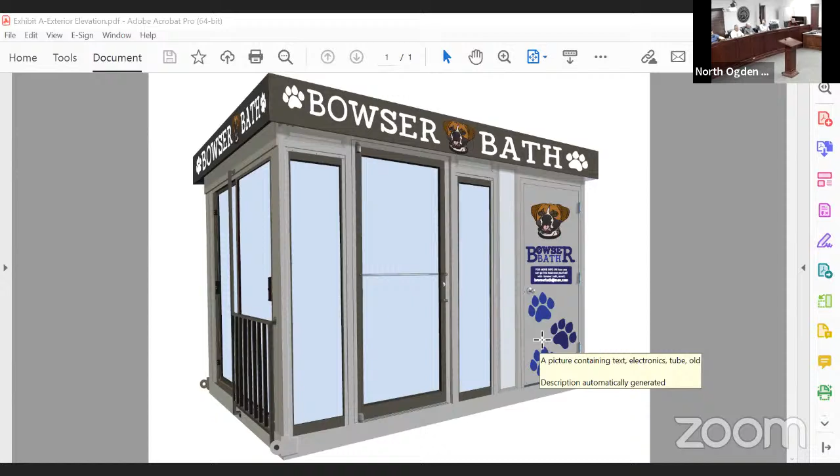I guess we take action. We need a motion to approve this site plan review. Make a motion to approve this site plan review, 2022-5. I'll second that. We have a motion and a second. Any other discussion? Start with Commissioner Nancaro. Yes.

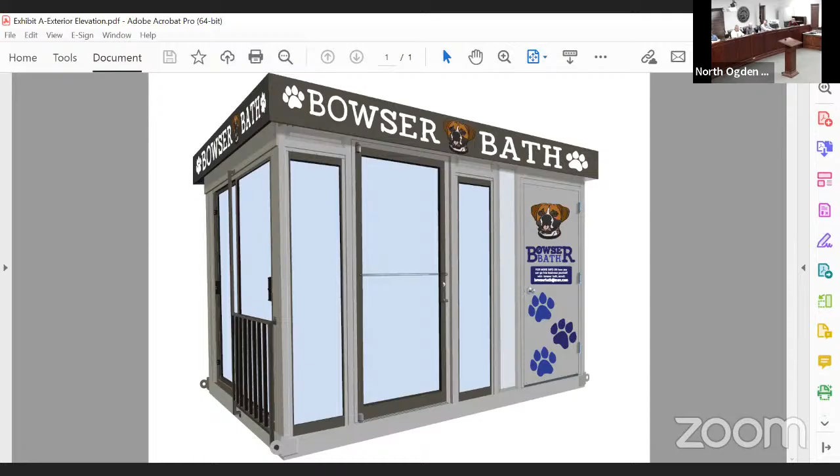She muted. Yes, just taking it down. She's waving her hands at you online. No, she's... Commissioner Watson is giving us a thumbs up. I wonder if this will work.

I bet we can hear you now. Commissioner Nantero? Okay, thanks, yes. Commissioner Barker? Yes. Commissioner Lund? Yes. Commissioner Webb? Yes. Commissioner Watson? All right, I vote yes.

Have we only had 5 site plan reviews this year? Probably, yeah, we don't do a ton of site plans. I thought we had more than that. How much is it, usually? Not much. We usually have 2 or 3 every 4th of July for the fireworks tents.

Well, we don't review those as a site plan anymore. There are different tracks - business licenses and land use permits that we process dozens of site plans on, which are more like a really simplistic aerial image of where you're going to locate items. We do those regularly, especially with tenant remodels or snow cone shacks and temporary uses. This one is elevated to the level of site plan because it's going to be bolted to the ground. It will be effectively permanent once connected to our utilities. That's fairly different from a general pull-in-and-park trailer food service cart or something like that.

Okay, we have no legislative items tonight, so our item 7 is a discussion and training item. Training is going to be complete streets and active transportation in the general plan. Our presenter will be our planning director, Scott Hess.

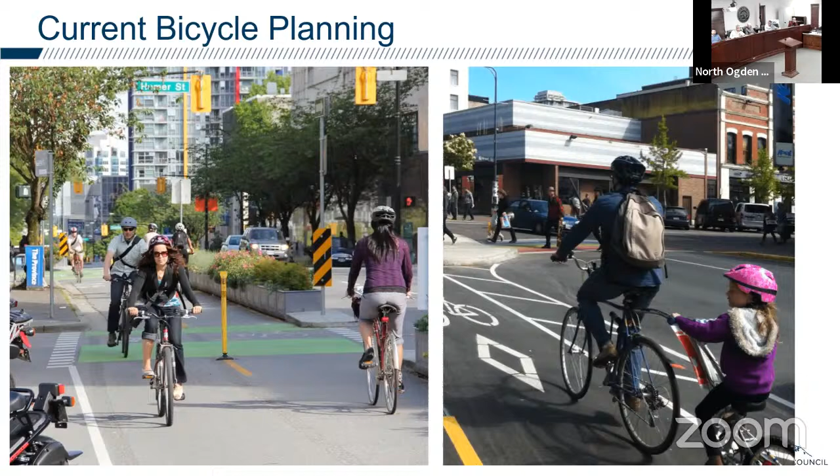I was talking to John earlier today about bikes and commuting and e-bikes and the possibility of ease of getting around town. And with those being so prolific, you make sure that your community is planned in a way that's safe and encourages people to get out of their cars and do what are the majority of trips for the United States household, which are between 1 and 3 miles, and do them on a bike and replace those trips. E-bikes have really changed that, and I see that on 2600 a lot.

They're essentially fearless riders. They'll go out there and ride high-speed roadways, take the lane, they don't really care. They're going to get their ride done. That's the head down, butt up cyclists. They're out there because they either have to be there, they have no other option, or they're there for recreation or commuting.

9% of folks are casual and somewhat confident. They might ride a bike lane on a slower speed facility, like under 35 miles an hour. But the majority of people, 60%, are interested but concerned.

It's, I would ride a bike if I had a safe way to get there. Or, I love going down to St. George on vacation and I rent an e-bike because it's so easy to get around there, it's all connected by trails. But they can't envision that they can come home and have that in their community.

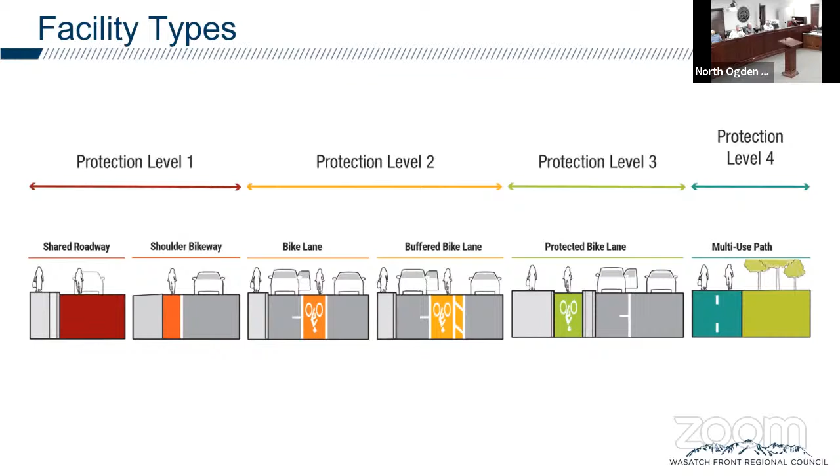So focusing on these higher level protection areas—what you might think of in a community like North Ogden is, you're not going to get them everywhere, but you might get a few really good key connections in the city. So focusing that largely, really large infrastructure costs, down on a few specific key corridors.

Your likelihood of living through being hit by a car is like on an exponential curve. So under 10 miles an hour, it's really, really high, at 25 miles an hour it shrinks down, and over 35 miles an hour it drops to almost 0 on the scale of pedestrians and bikes. This is based somewhat on psychology, user experience, perceived safety, and also on the reality of analyzing vehicular and pedestrian accidents.

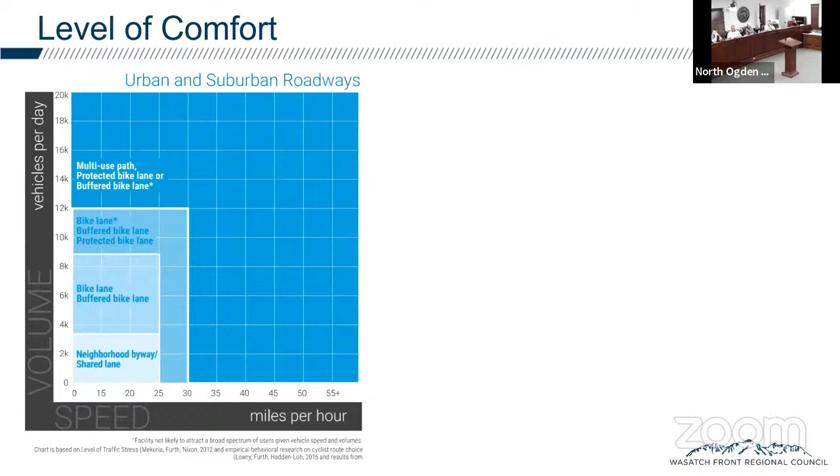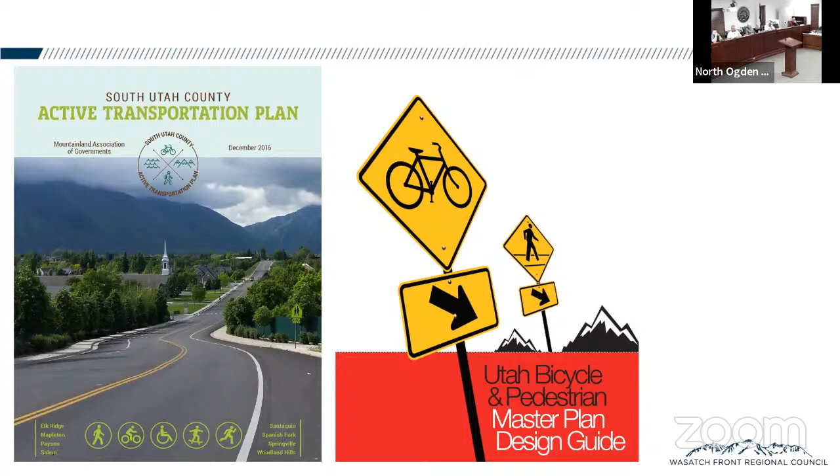There's potential for education and engagement programs for youth and adults. Bike Utah, our state's nonprofit organization, provides bike rodeos—they'll bring helmets out and teach kids the rules of the road.

They'll try to get people interested in that. I don't know if we've ever done a bike rodeo as part of Cherry Days, but that would be a great captive audience to have something like this.

Sometimes you talk about wayfinding and signage. We actually have funding specific for wayfinding and signage, which would create consistent signage across the city—consistent signage, say, at the canal trail.

This might seem obvious if you've lived in the city a long time, but I'd bet there are hundreds of residents who drive up and down the road and don't realize that the trail they pass every single day connects as far west and as far east as it does.

Even when they drive by 1050 versus 4th East, they might not realize that's the same connected piece of trail network. So having consistent, consistently named signage is important.

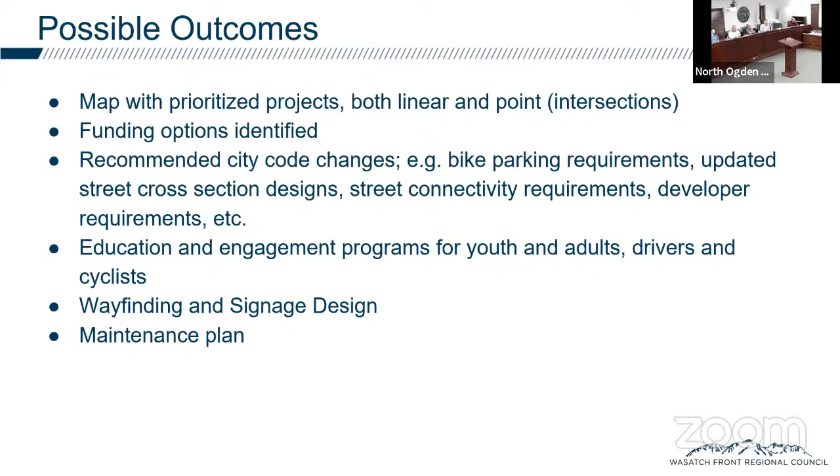So last is this list of resources. The Wasatch Bike Plan is kind of interesting, John—I don't know if you can click on that one.

Back in 2015, when I started as the active transportation planner, Salt Lake, Davis, and Weber counties were really, really far behind the region in bicycle planning.

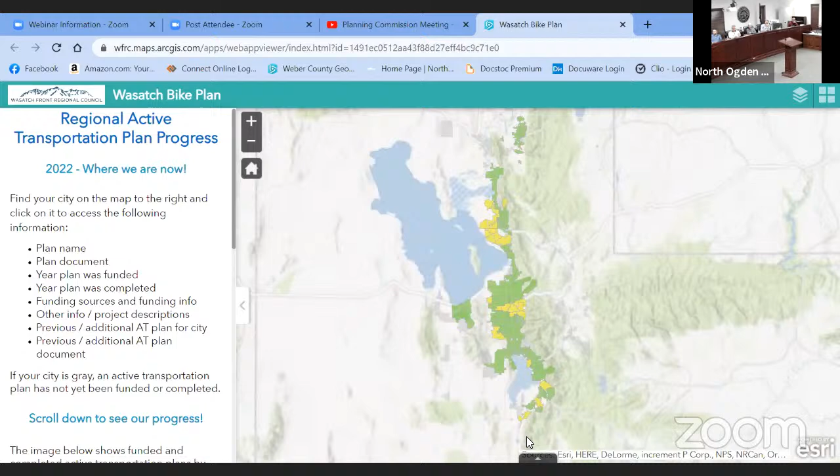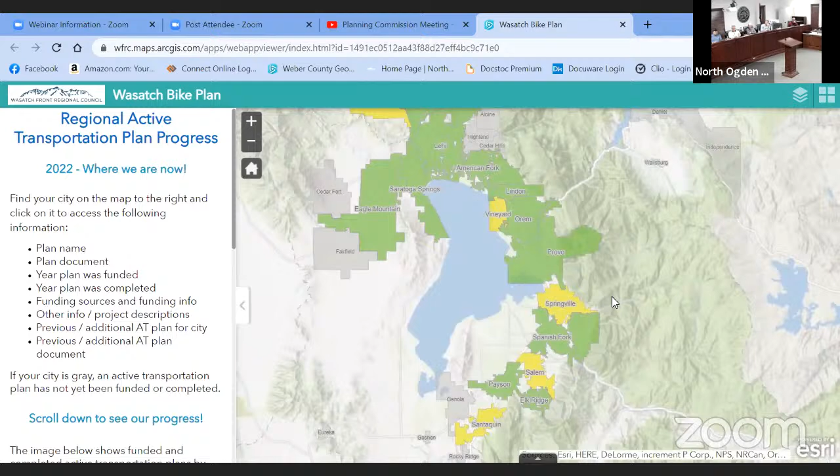So if you zoom out just a little, because that's showing Salt Lake and Weber as it scrolls through. That little lower crescent shape is Utah County, and in 2015 that was entirely green, so they all had active transportation plans down here, but as you scroll up north, these were not populated with green.

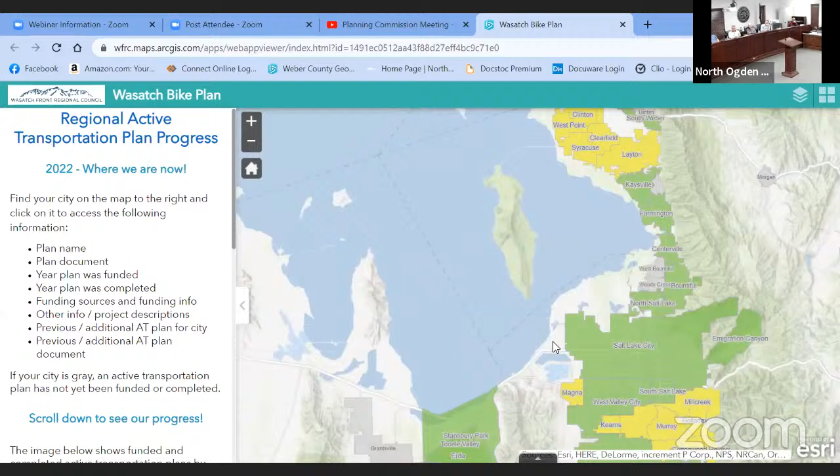I thought I don't see that left right here, John, that says scroll to see our progress. One of these, scroll down there. Okay, here you go, it's going to populate through. So this is 2015 to today, and that's what it looked like, empty in 2015. Then today, green means done, yellow is plans in progress. So ours pops up here in 2021.

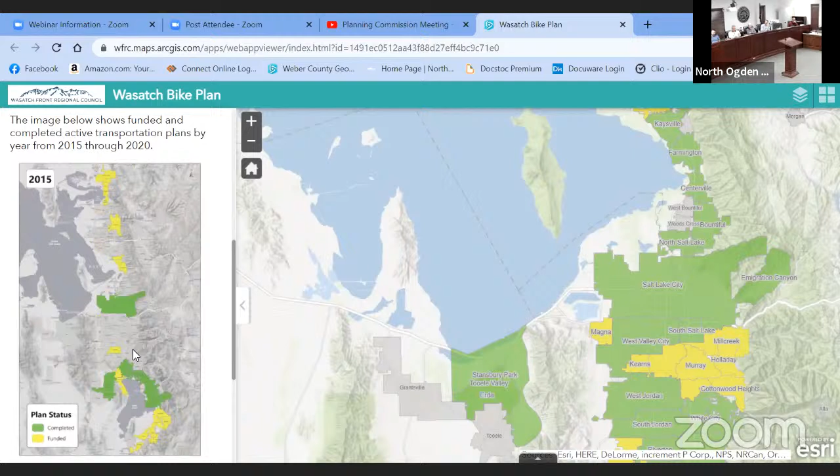It's been pretty incredible to see the traction that active transportation planning has had across the region, what it's meant for connected facilities. You can now ride from the mouth of Ogden Canyon down a connected network of trails to Bridal Veil Falls on what's called the Golden Spoke Network. That's planned to go north all the way into Brigham City, using the old Denver Rio Grande Rail Line corridor and the canal trail.

Not our canal trail, because it's all west, like Harrisville, Pleasant View. But you have these hub and spoke trails that come off of it. So how does Pleasant View plan a connection that goes from Smith and Edwards through Pleasant View, picks up the canal trail, and gets you all the way down to Coldwater Creek, for instance? You could ride from Coldwater Canyon out around the canal trail and then down 140 miles to Bridal Veil Falls.

It's a pretty incredible ribbon of connected facilities that has come together mostly through implementation of one easy to focus on active transportation resource, but the planning around it has been great to see, and really encouraging the last 7 years to see the number of plans developed and implemented. Now we'll have ours pick up here in North Ogden next year.

So that's active transportation planning generally. And look, they just touched. Yeah, see, we're over time.

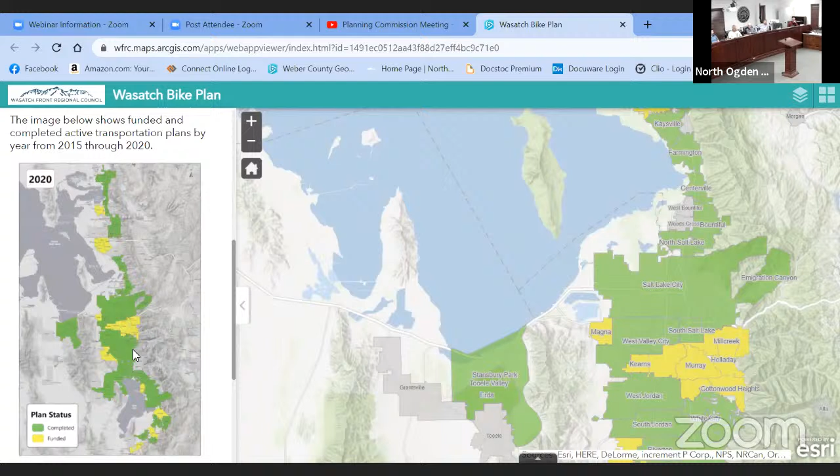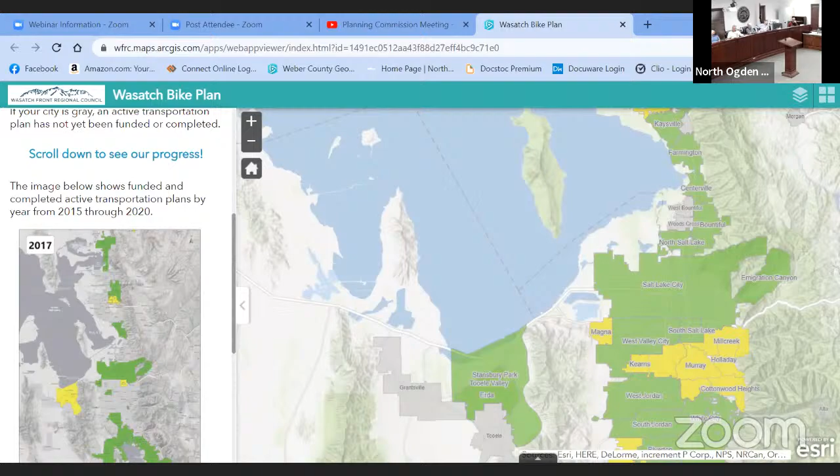I'll show you one more quickly, and then we can have any discussion about it. Within our general plan, we have a complete streets policy. And I don't want to call it a policy, it's more like a complete streets section within the general plan, because a policy to me would say it's been adopted into our public works standards and guidelines.

It's the difference between, we might desire street trees everywhere, but the zoning code says we only have to do them under these specific circumstances, right? So same thing with the complete streets policy.

So if you can pull up the general plan. Oh, our general plan, yeah, the link to the general plan, it's page 37, and I know you've all read this, it's only 386 combined pages. So I expect you all to read the whole thing before we start going through it. Is it on the slide, the link? No, I sent in the email I sent you, just click the link to this. So if you can't pull it up, it's okay.

A complete street integrates diverse modes of transportation in a way that benefits the widest portion of the city's population as possible. The nice thing about using complete streets as the lens you look at things through is that Washington Boulevard, with or without maybe a bike lane and a wide sidewalk, could be constituted as a complete street. It doesn't mean every single road has every single thing on it. What it really should be is more like complete street networks.

So maybe you end up with Monroe being ultimately a safer, more separated bicycle facility that's internal to our community and picks up more residential uses, but isn't designed to carry heavy truck traffic or be a future transit resource, and isn't even designed to be. Same with our neighborhood roads: those can be pared way down, so it almost restricts heavy truck traffic or vehicular travel, but they're designed to feel really comfortable for people walking and utilizing the neighborhood road connections.

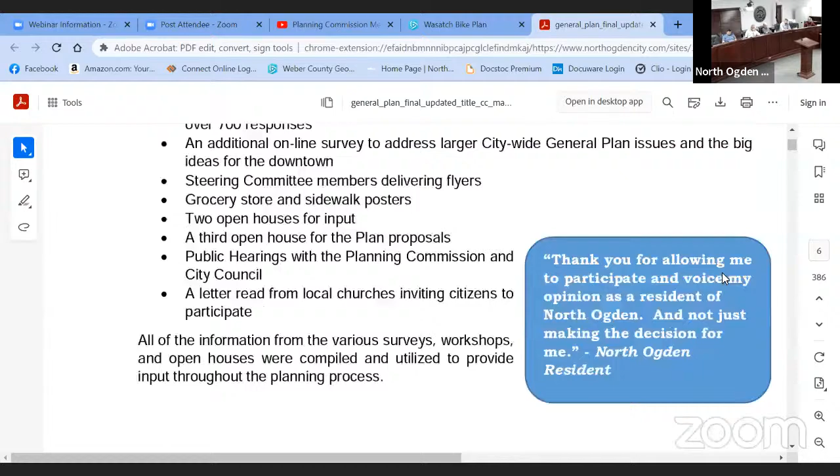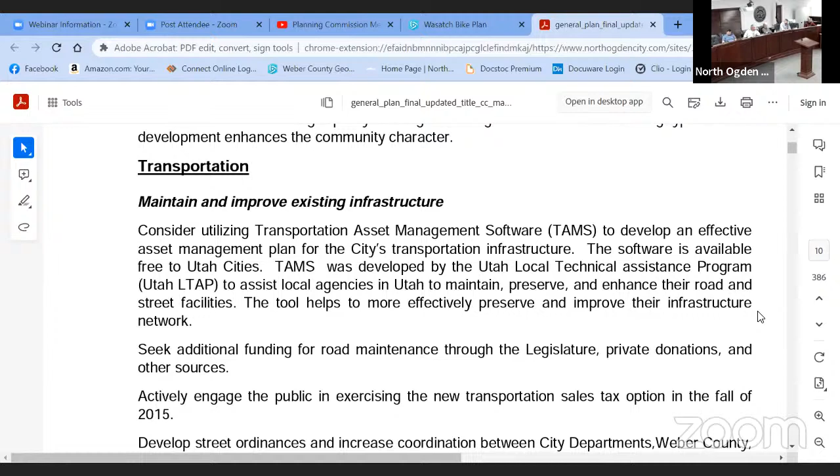We've talked a lot internally about restoring connectivity to communities, specifically sidewalks around elementary schools. What a complete streets policy, when adopted by Public Works, would do is establish at what level of investment in a road you reconsider everything. This isn't a white sheet of paper every time you do an overlay on asphalt. But when you repaint that street, you might consider on-street parking needs, bicycle lane needs, and whether to restripe in a different configuration. On a mill and fill, where they grind off a few inches of asphalt and overlay fresh asphalt, that's a federal trigger for correcting ADA ramps at all intersections. So if you mill and fill a road without ADA curb cuts, you'll have them at the end of that project. That's the lowest level of federal complete streets policy infiltrated and worked in.

When you're doing a major road reconstruction like Washington Boulevard, or if we were to use federal funds to construct Monroe Boulevard, that's when you really get to consider the curb to curb face width, what the sidewalks look like, and whether we have connections above, below, or within the street.

We had that conversation pretty heavily about Mountain Road. The Mountain Road cross section looks like a sidewalk on the south side, the downhill side. It just depends on which part — the road has bike lanes and then a separated trail. What was just said is really important: it depends on which part. Now we have a trail network that will enter into an existing sidewalk network, and what does that look like for other developers down the line? Our complete streets policy can be a place to have some of these conversations, and certainly our active transportation plan too. They're interesting, fun planning items that are coming, a bit outside the realm of normal subdivisions.

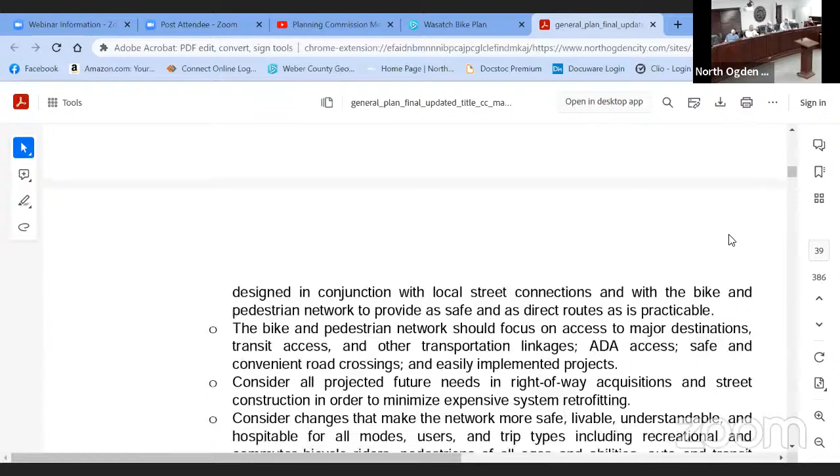It's right above the goals, and John's just getting to it now. So page 34 is where the actual complete streets policy begins. Right there — there's a complete streets policy embedded into the general plan, and it's worth reading through a few pages on this.

It's only 3 or 4 pages of the general plan, starting on page 36. Our general plan is a very aspirational document, which is good, but I don't know that that's translating down to some of the projects where we're actually getting implementation. One of the goals I was given is to shorten the general plan — make it long enough to say what we needed to say, but short enough that someone might actually be willing to open it and flip through it. I think it's too heavy on the words right now, and if we can tease out the important aspirational elements and shrink the document down, I think you'll have more residents and people engaged who actually read it.

That's basically everything I have for you from a presentation standpoint, and happy to take any questions or discussion.

Is this looking at modified streets as we go along, or just from here into the future? If we adopt a complete streets policy, my goal would be to adopt that and the active transportation plan into the public works standards, so that everybody's on the same page and knows that when we touch a road in the future, we either restore the bike lanes that are there or enhance them — maybe we look at ways to make them buffered bike lanes.

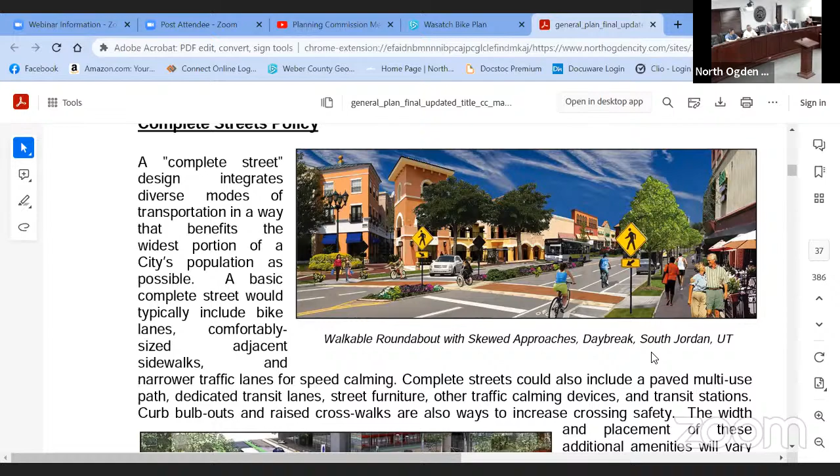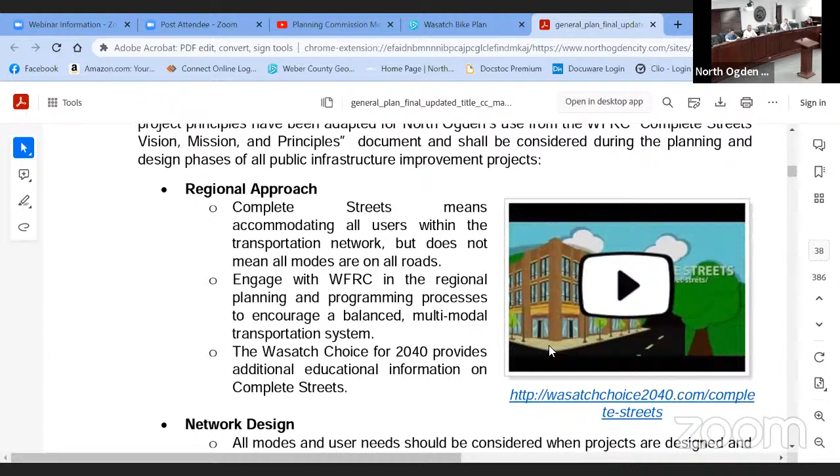Because there's a lot of streets that just aren't good for bikes, but people still bike them. There's no shoulder whatsoever. Are those looking to be modified, or just like Fruitland Drive and Mountain Road? Those are not good for bicyclists. They're not good for walkers.

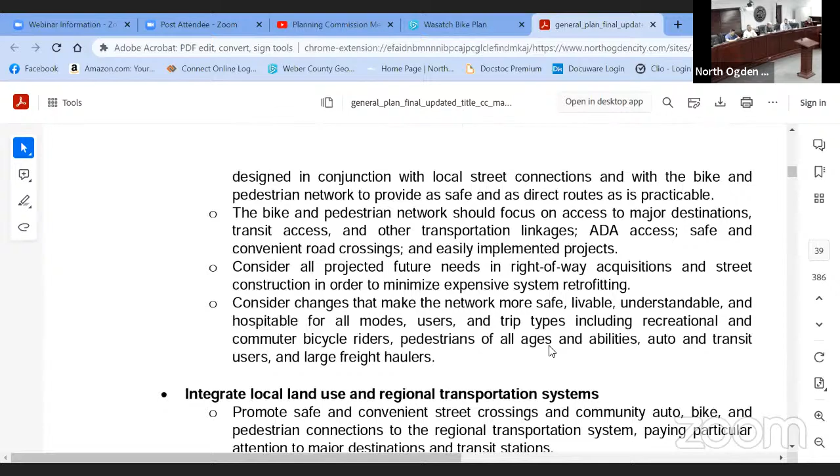Fruitland's a good example of a road that has a history in the city of being a country road that creates a community feel. And maybe we look at not doing standard sidewalks above curb on Fruitland. Maybe it's an asphalt trail along Fruitland on the single side or something like that.

We would encourage people to get out the way Pleasant View Drive has that asphalt trail. And that's a trade-off. But I think that we don't get stuck in, but we kind of get the idea that every road as it improves over time will always be sidewalk, curb, gutter, full road improvements, and they can look like whatever our vision for the future is.

Not indicating my age, but Fruitland Drive and Mountain Road, those bicycles, I used to bicycle all the time, but there's no traffic. But you kept getting stuck in the mud because it wasn't paved yet. No, after that time, I come along about a week later.

I didn't even ride horses on those streets. You can't do that. Yeah, a lot of steel tired bikes. One big wheel in the front, one little one in the back. I had to chain up my bike to get it out of the mud. I had chains on my bicycle back then.

Okay, any questions for our planning director on his passion for bicycle lanes?

Hey, I'm right there with him. I think it's great. I just have to say 50% of our community could be a bike community. E-bikes are changing that a lot, though. A lot. Yeah, my kid comes down this way all the time on his. And they're getting fast too, when they can go slow back up the hill without having to pedal.

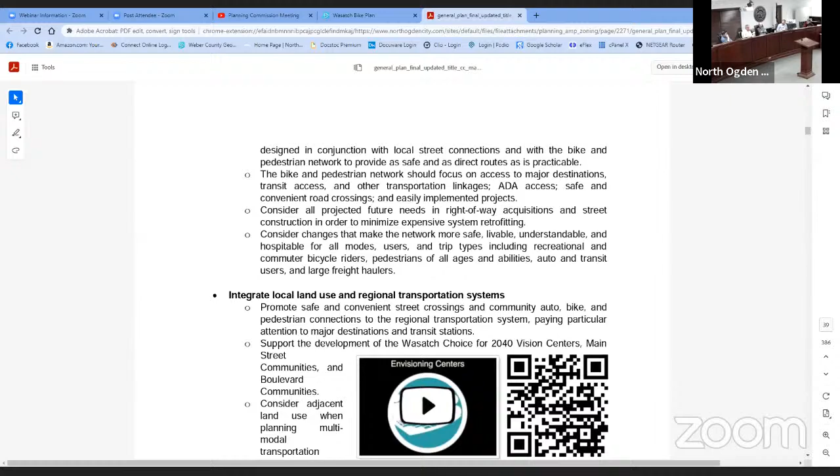Some neighbors might just, if the solution is regrading their neighbor's property, want their property to be left alone more than they disagree with the height of the wall adjacent to their property. I'm not saying that's what's happening in this particular case, but it's an interesting case, neighbor to neighbor. They might say, I like the amenity I have in my landscaping that predated the wall, so I'm willing to accept a wall that's 3 feet taller than code in order to be left whole and ignored essentially.

For staff's side of this whole thing, it comes down a little bit to the ability to administer the ordinance. Looking at aesthetics, that's great. It works really well when you plant that row of boxwood bushes up front, but you go through a drought, those die. We don't even have code enforcement to go after our most obvious items, like dead trees, things in our commercial districts on roadways that our 20,000 population is literally seeing every day, let alone onesie-twosie individual property owners.

So I think those bushes die and then there's no enforcement arm to get them replanted in the future, and that wall just exists forever. But again, that's where you come into the aesthetics of it. It's like, well, we don't need to govern people's landscaping.